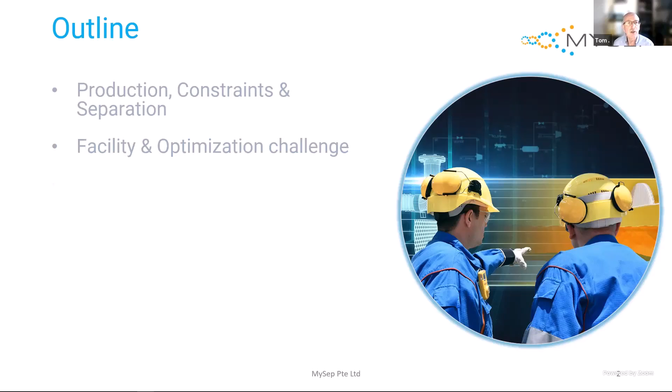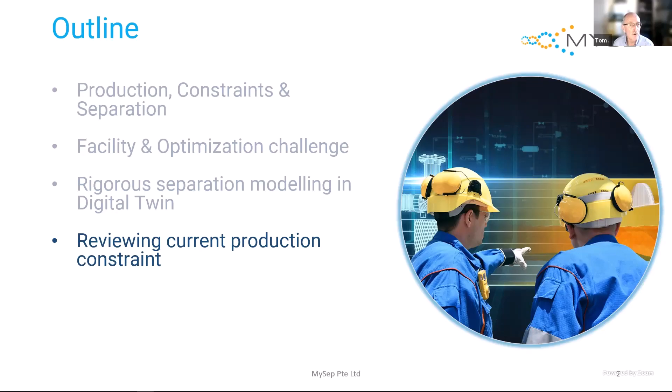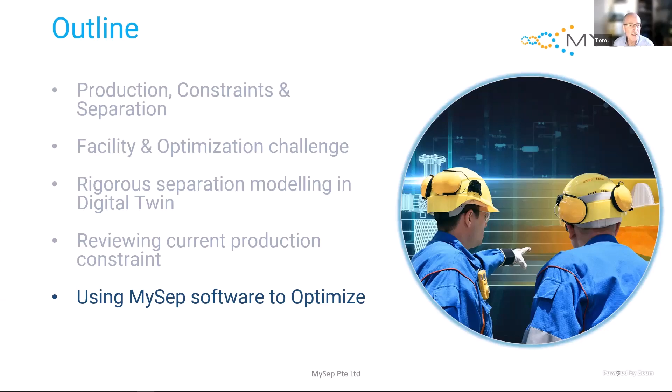So I'll outline what we're going to cover. I'll talk about production constraints and separation, and focus on an example which shows the challenge of optimizing production of a facility of modest scale. How do we get rigorous separation into a digital twin? That's really at the heart of this challenge. I'll show how we can reveal the real production constraints and how our digital twin can help us optimize to mitigate the constraints and hence increase production, increase revenue and margin. Finally, I'll try to summarize the value of what we've revealed.

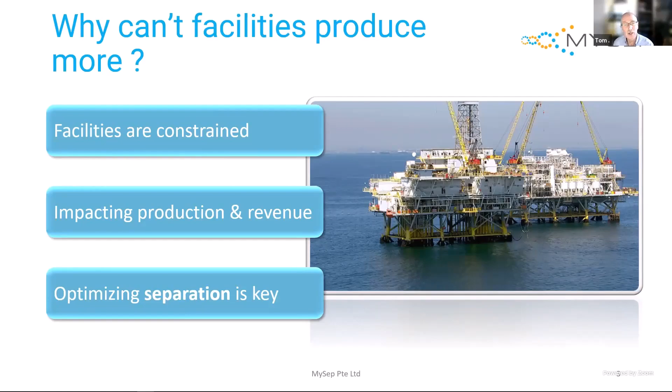So why can't facilities produce more? Across the globe, our customers are trying to produce more on existing facilities. In the US Permian, Gulf of Mexico, North Sea Basin, Middle East and Southeast Asia, they're deploying production digital twins to explore, for example, tiebacks to new wells and other strategies. More often than not, a key constraint will be separation capacity: the capacity to separate gas from liquid and liquid from liquid within the facilities.

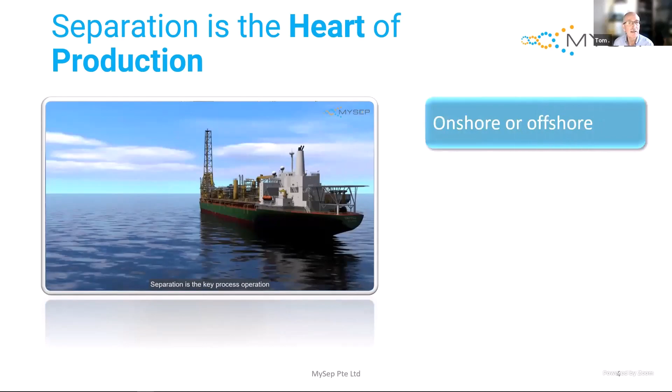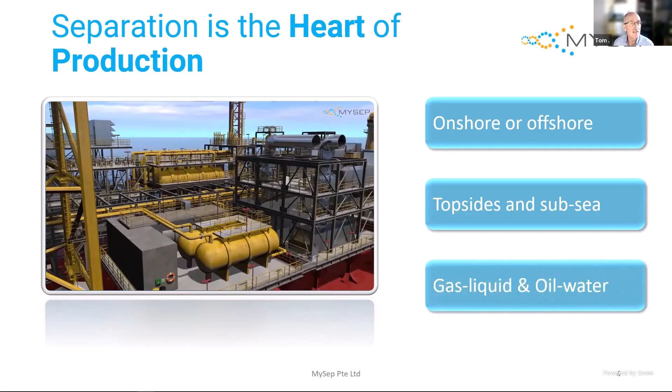So what I'd say is that separation is the kind of beating heart of the production process. On a typical mid-scale FPSO, you can see the prominence of separation vessels, and this is just some of them, for various two-phase and three-phase separation services.

So really, the key production task is to separate and prepare the hydrocarbons for export from the facility. We've got to separate the gas from the liquids. We've got to separate the oil from the water. We might need a number of stages.

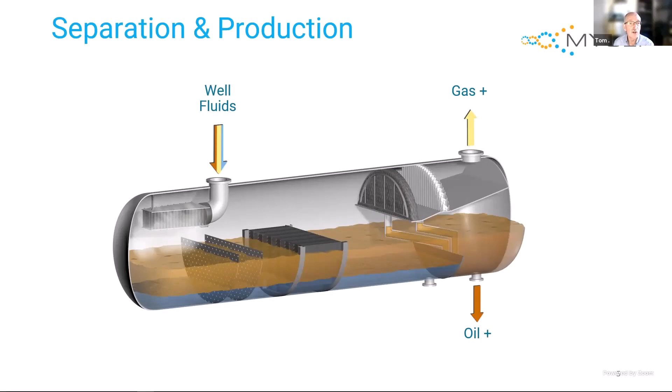The bounty of the hydrocarbons that we have holds within them one of nature's surprises. It's quite hard to separate with 100% efficiency. Here, the issue is mist, and I'm going to focus on that - the liquid that's entrained as droplets within the gas that may well be transmitted through our separation device and on into the process.

MySep's rigorous calculations start by predicting the mist fraction and droplet size distribution in the inlet pipework system, and then proceed incrementally with separation efficiencies for inlet devices, gravity section, demisting devices, finally predicting the outlet mist fraction and droplet size distribution.

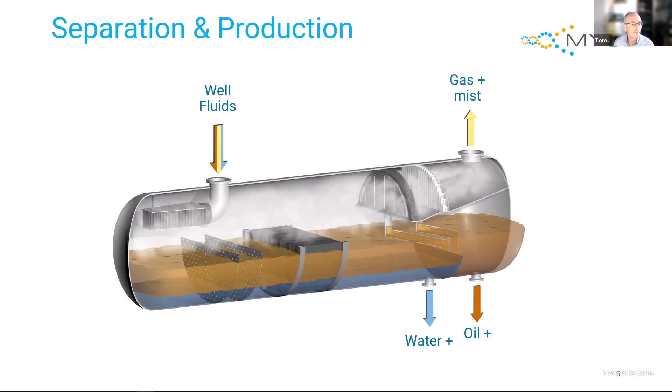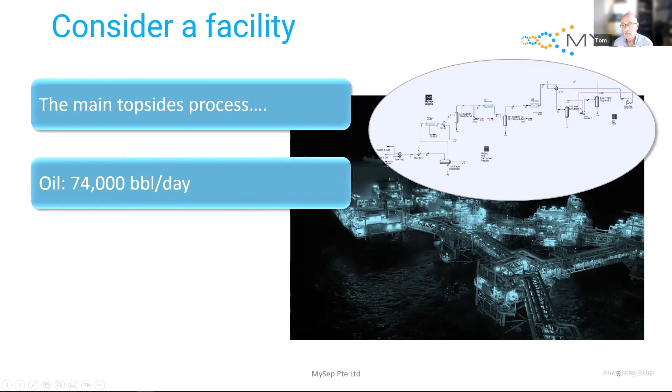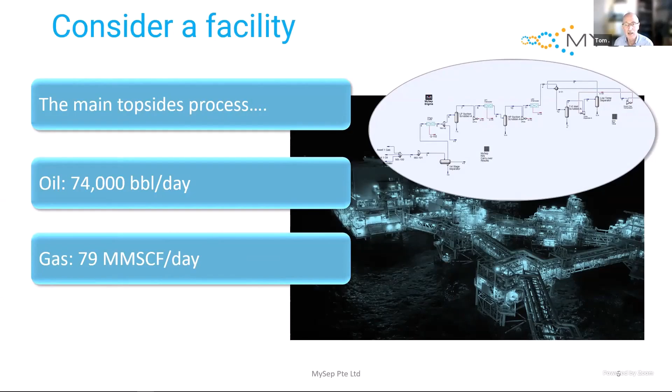So up here, we want to control the hydrocarbon dew point. With that in mind, can we increase production? Presently, on this facility, we're producing 74,000 barrels a day of oil and 79 million standard cubic feet per day of gas. The production revenue is calculated at around $6.5 million a day. If we can make more money, of course, we'd like to do so.

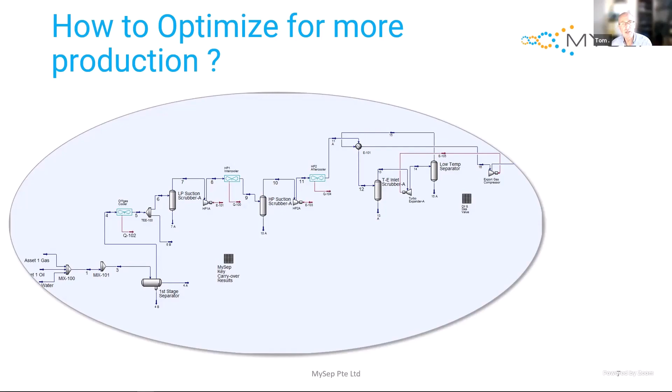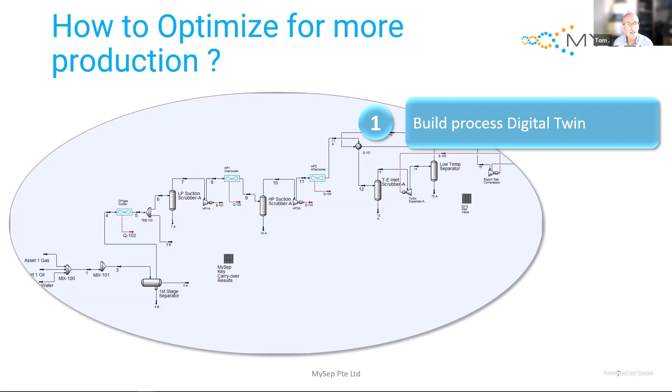To optimize, like many of the customers I mentioned, we deploy a digital twin. A process digital twin would be based on an industry-leading simulator platform like Aspen HYSYS or AVEVA PRO/II, Honeywell's Unisim, KBC's Petrosim, Schlumberger's Symmetry or Kongsberg's K-Spice. It could be steady state or dynamic. Today, I'm going to just show a steady state digital twin.

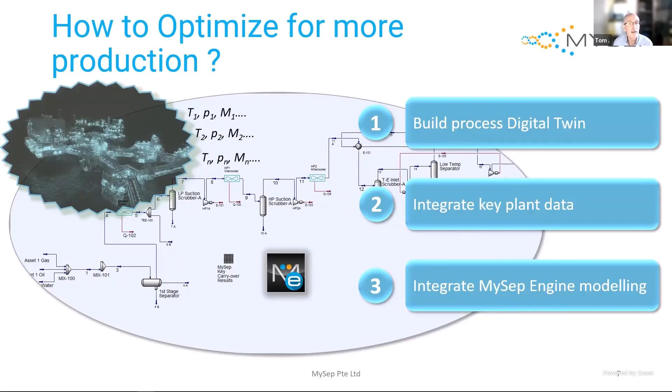And it will be integrated with key plant data that's derived from our DCS or from a data historian or enterprise data lake. Those data will be key parameters that we'd feed into a digital twin. As the process simulators have no physically representative separation modeling native to the platforms, we must embed the MySep engine model to have a fully functional production digital twin.

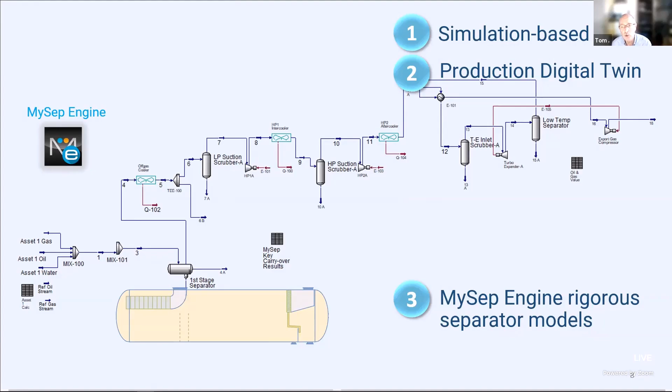By adding the MySep engine, we can introduce fully physically representative models of each of the separators that are important on our system, like the first stage three-phase separator, the low pressure suction scrubber, and the high pressure suction scrubber. Each of these needs a fully representative model that simulates the separation performance within the overall process simulation.

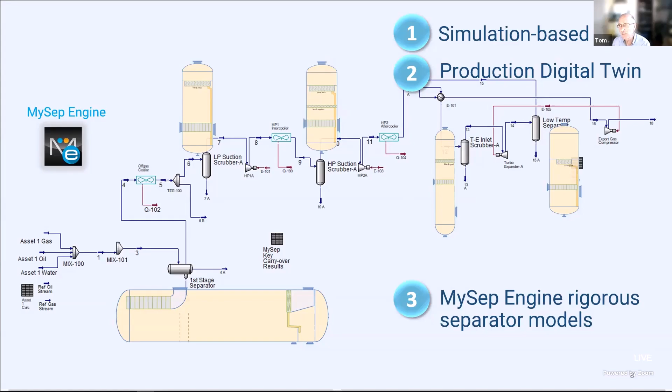Remember, here we have the low temperature separation controlling the hydrocarbon dew point of the export gas.

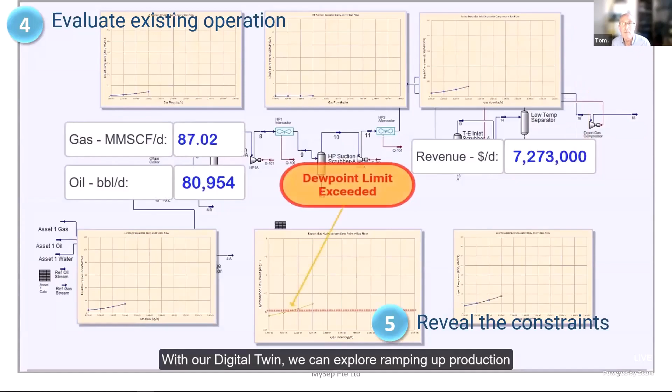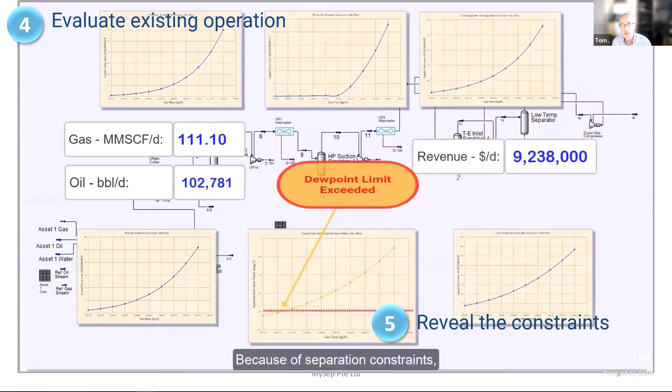So to evaluate the operation, we might well look at ramping up production with our digital twin. In the graphs, we're seeing it develop the carryover for each of the separators on the system: the LP suction scrubber, the HP suction scrubber, the turbo expander inlet separator, and the low temperature separator.

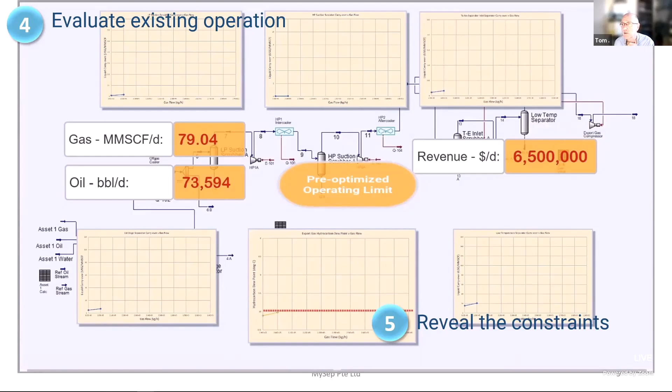I've also graphed the hydrocarbon dew point, that quantity specified for the export gas leaving the export gas compressor. So we've revealed in our digital twin why we're constrained to this level of production.

I like to call this the pre-optimized operating limit. Here we see we're pegged at 79 million standard cubic feet per day of gas production, about 74,000 barrels a day of oil.

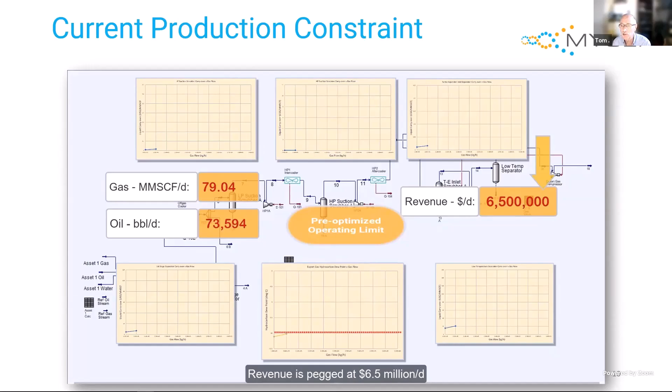In terms of revenue, that's worth about $6.5 million a day to us. So that revenue and production is being pegged by the maximum allowable hydrocarbon dew point on the export gas.

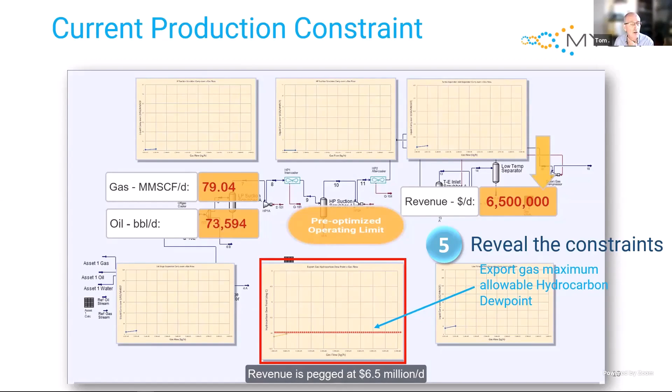Now with the MySep software, we can explore whether we can optimize the separation system. Can we fit the existing vessels with internals that allow more production?

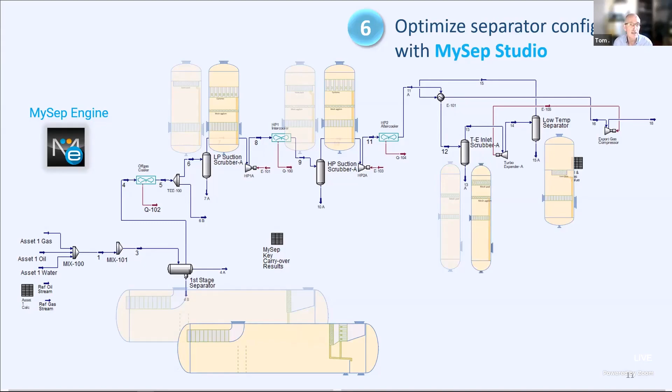We could look at the first stage separator, the LP suction scrubber, the HP suction scrubber, and develop, if possible, optimum internals that fit within the existing vessels to allow us to retrofit and potentially upgrade production.

Focusing on that first stage separator, currently in terms of gas liquid separation, its internals are a vane type inlet device and what's called a vane pack demister device.

We can potentially replace that with a higher performance arrangement, putting in an agglomerator, and downstream of that, a high performance cyclonic separator demister. Those cyclonic demisters and the agglomerator in combination can get us higher performance for this separator.

And each of the separators in turn, we could look to see how we optimize the overall system.

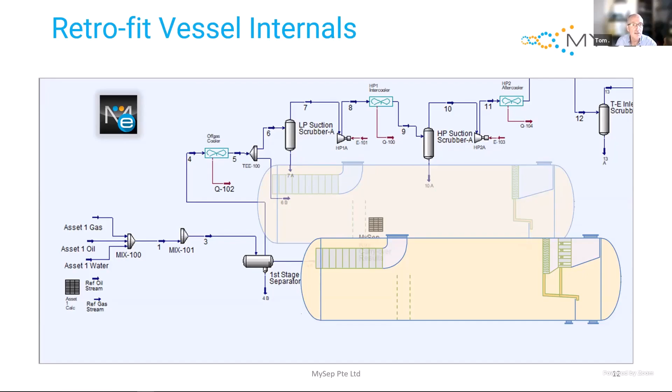So optimizing the system, we can again use our digital twin to explore the behavior with the retrofits we've identified. We see here that potentially we can make the hydrocarbon dew point of the export gas independent of the production rate.

That means potentially we can significantly increase production until we're constrained by some other element in the system. Indeed, here we found that we moved to a stage where we've increased production to 82,000 barrels a day of oil and 88 million standard cubic feet per day of gas.

At that level, we find we're constrained by compressor capacity and the risk to the integrity of the compressor.

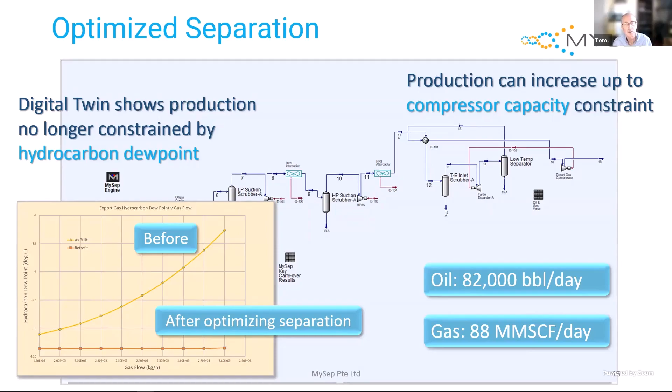Summarizing what we have achieved with the digital twin, using that rigorous digital twin, we found originally we're constrained at these levels of oil and gas production, with a revenue of $6.5 million per day.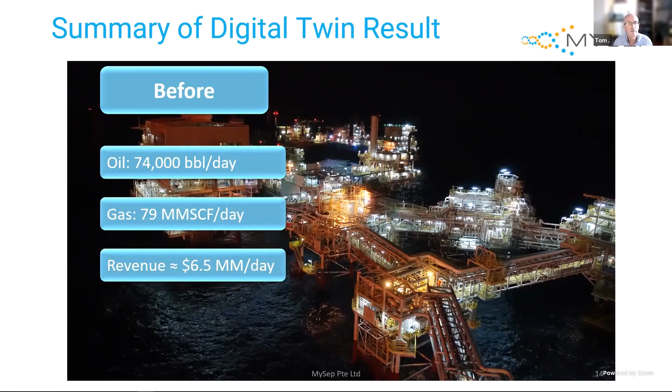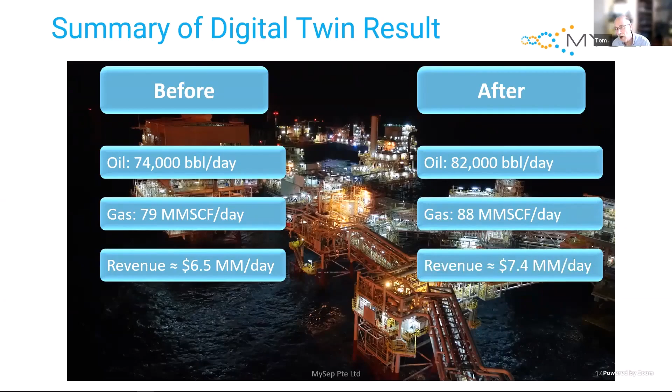Looking at optimizing the system and using our digital twin to prove that optimization, we can increase production to 82,000 barrels a day and 88 million standard cubic feet per day of gas, with a revenue per day of $7.4 million, increasing the annual revenue on the facility by about $325 million.